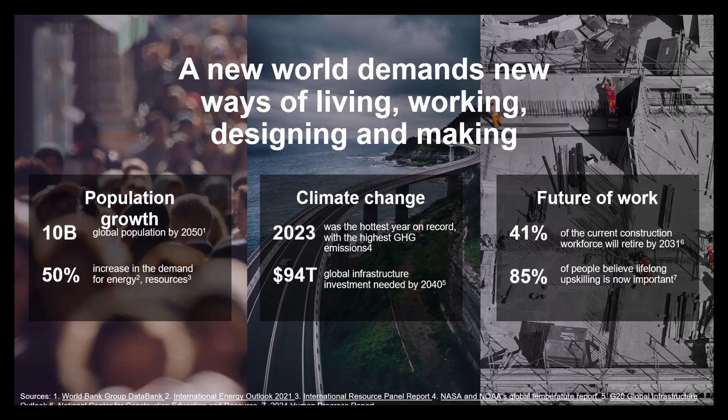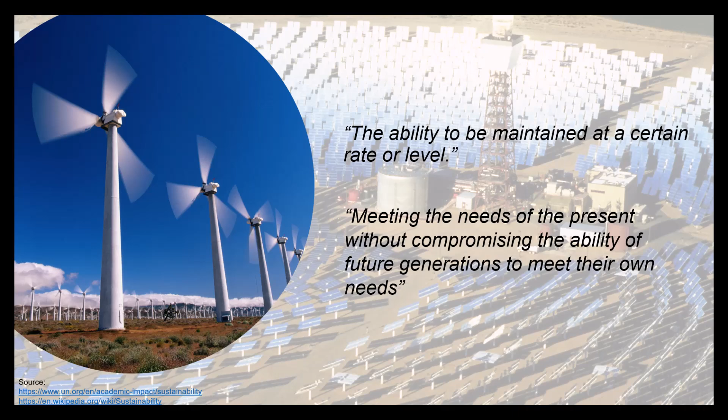It's time to produce more with less. But what is the meaning of sustainability? There are multiple definitions. We can call sustainability the ability to maintain a certain level without compromising the future.

According to all the studies, there are three main dimensions for evaluating sustainability: environmental, economical, and social. As you can imagine, all of these aspects are huge, and the presentation will be focused only on some specific aspects. It's also important not to confuse sustainability and resiliency.

Resiliency in general is the capacity to adapt quickly to any change. Resilient infrastructure refers to the systems and structures designed to withstand and recover quickly from disruption, like natural disasters, climate change impact, or other hazards.

Sustainable is different from resilient. Resiliency supports sustainability by extending infrastructure lifespan and reducing resource use due to failure or reconstruction.

For example, sustainable roads use low-emission materials. Resilient roads resist erosion from heavy rain. A sustainable and resilient road does both: reducing emissions and surviving climate extremes without needing frequent repair.

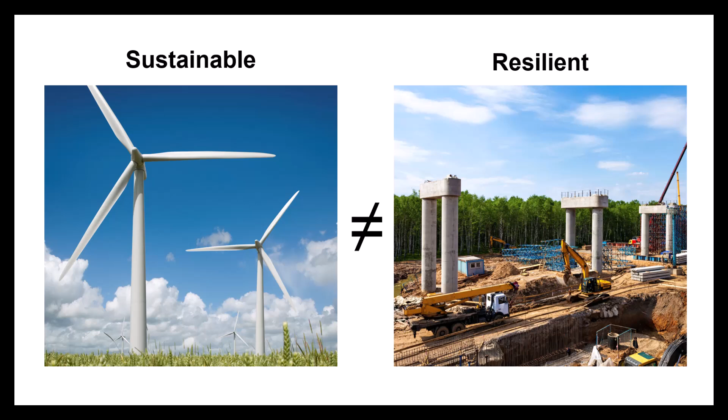The goal of sustainable infrastructure is to reduce environmental impact across the life cycle: design, construction, operation, and maintenance. Key features could be the usage of low-carbon materials, for instance recycled asphalt or green concrete.

The ability to support clean mobility, EV charging stations, bike lanes, public transportation, being more efficient in energy consumption, minimizing resource usage, for instance reducing water use or optimizing land use, and keeping attention on life cycle analysis and BIM to track emissions.

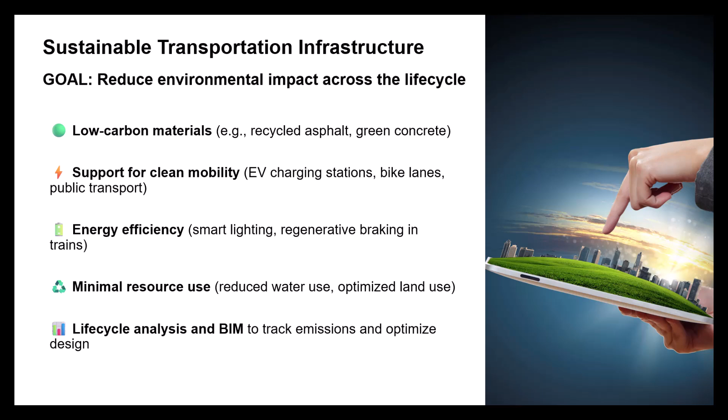And optimize design. But as mentioned before, the concept of resiliency is not the same as sustainability. Then the key factors to consider to design a resilient infrastructure might be flood-resistant design.

Heat-resilient materials, seismic design standards, the usage of digital twins and sensors to monitor infrastructure in real time and predict failures, and introducing redundancy and flexible networks.

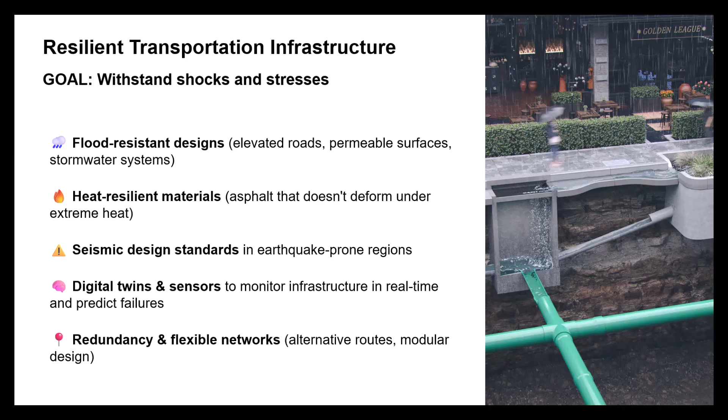These two main concepts of sustainability and resiliency are very wide and represent only one of the main challenges for the future, but also a tremendous opportunity.

Let's start analyzing the Autodesk AECO portfolio. The AECO portfolio technology offering is robust and broad. We have technology for any project stage and for different outcomes of the project.

Mainly, we can consider three main parts. The AECO Collection, with all the tools for design in different stages and in different sectors. The water infrastructure solution, addressing specific challenges for the water industry. And finally, Autodesk Construction Cloud and BIM Collaborate Pro for digital collaboration.

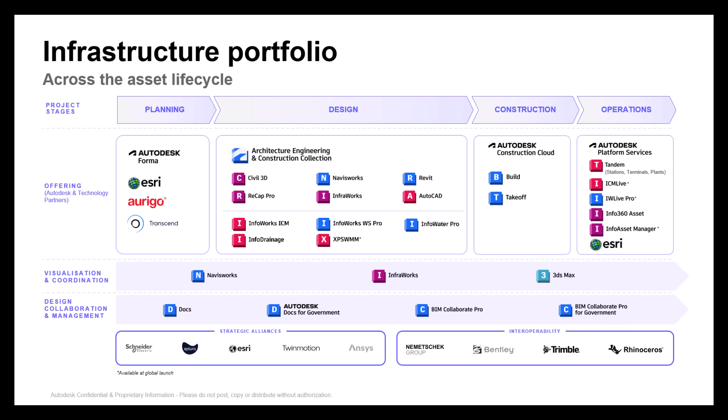According to the previous concepts, I would like to underline some specific capabilities. GIS is the first element that is important to mention in infrastructure projects. With GIS, it's possible to represent thematic maps and understand where the project is developed and which constraints are located near the location of the new infrastructure.

Autodesk and Esri have built a strategic partnership since November 2017. With this partnership, Autodesk and Esri technologies have multiple touchpoints. This partnership makes the integration between BIM and GIS stronger.

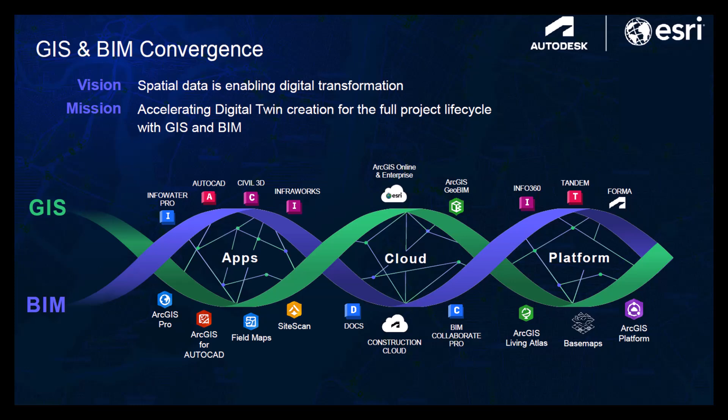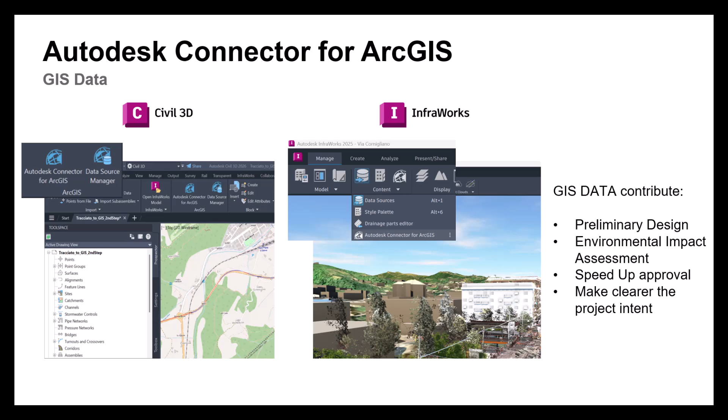Talking about technology, we developed the ArcGIS connector on top of Autodesk Civil 3D and InfraWorks. This connection helps streamline the GIS data between BIM and GIS, for instance, helping designers and planners to design faster in preliminary design, building environmental impact assessment, and speed up the approval process, making the project intent clearer.

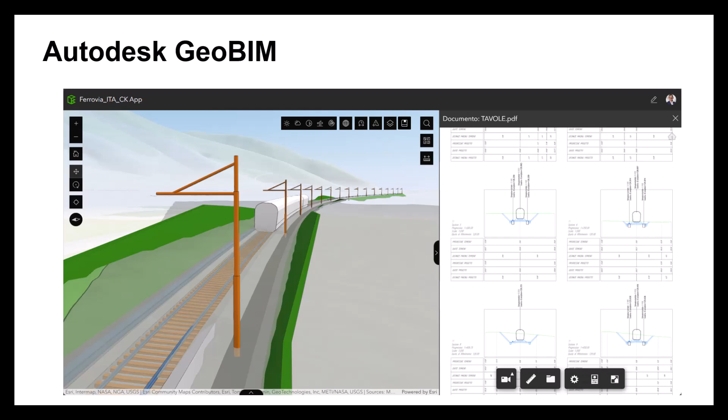But ArcGIS connectors are not the only opportunity. With GeoBIM, designers can integrate project information and geospatial context by creating a connection between the building information modeling cloud and geographic information system cloud solutions.

Carbon footprint is another crucial aspect for designing resilient and sustainable infrastructure. Talking about total carbon, that includes both the material and construction processes of creating the roadway or railway, and also the operational side of construction. For these key topics, we can count on three different applications: two Civil 3D plugins and an InfraWorks capability.

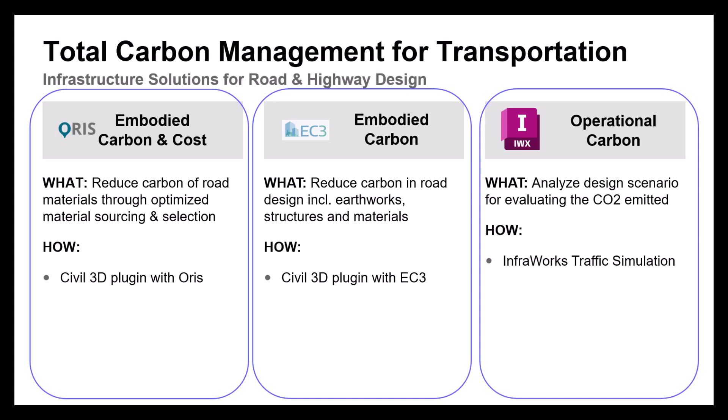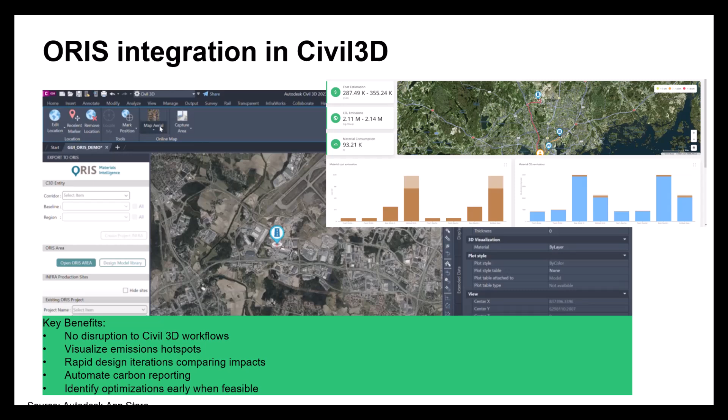The first plugin available for the carbon footprint evaluation is ORIS. ORIS is a third-party application for Civil 3D. With ORIS it is possible to import a Civil 3D project for a comprehensive evaluation of carbon and supply chain impact across specifications. The key benefits of this plugin are that it's integrated in Civil 3D, allows rapid design iteration for comparing impact, automates carbon reporting, visualizes emission hotspots, and identifies optimizations early when feasible. The ORIS plugin is available in the Autodesk App Store.

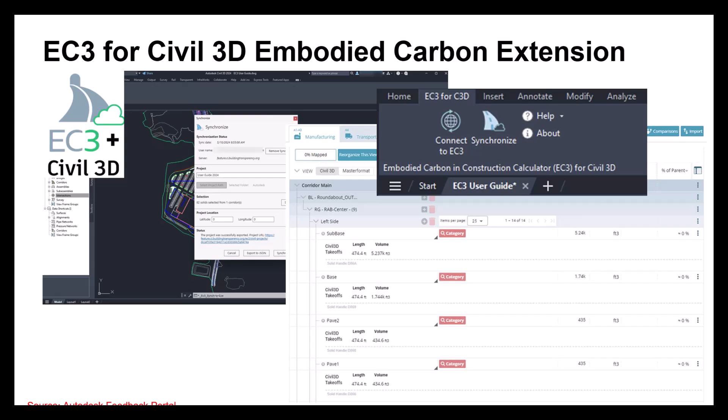EC3 for Civil 3D is an extension available in our Autodesk feedback portal. This application is part of the beta program, so it can change at any moment. EC3 is the only free and open access global embodied carbon accounting tool. EC3 enables carbon smart choices during material specification and procurement. EC3 allows designers, construction companies, and material suppliers to directly measure, compare, and reduce the embodied carbon for their products and projects. In both cases, with ORIS or with EC3, material analysis is crucial to take better decisions.

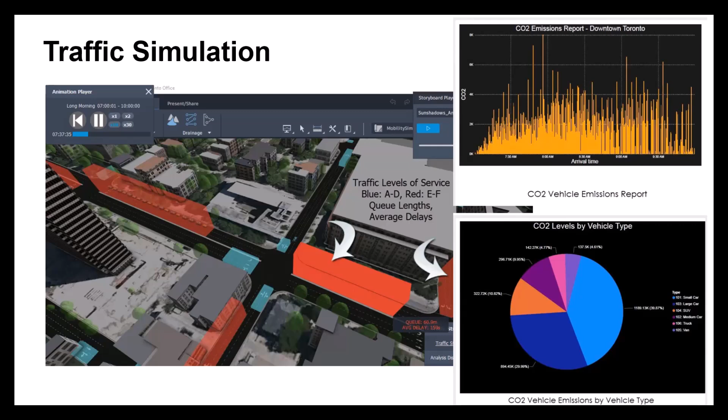The last application that I would like to mention is the traffic simulation module. With mobility simulation, traffic simulation is one of two specific engines that you can find in InfraWorks. Designers can use the traffic simulation tool to analyze traffic flow through intersections, display color-coded traffic analysis results, and generate traffic simulation animations to play in our model. Use the traffic analyst panel to specify advanced demand matrix profiles, vehicle types, driver types, and of course the emissions.

Water is one of the key aspects for the sustainability and resiliency of infrastructure. Water is a precious element, but it can be a threat. Due to the climate crisis, different regions of the world can be impacted by water scarcity or by devastating floods, damaging infrastructure and houses.

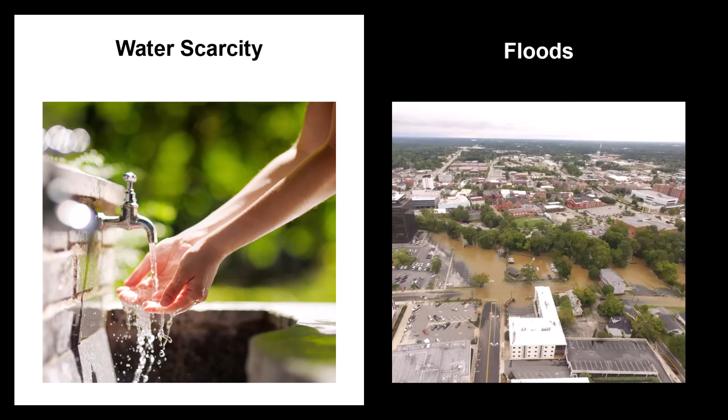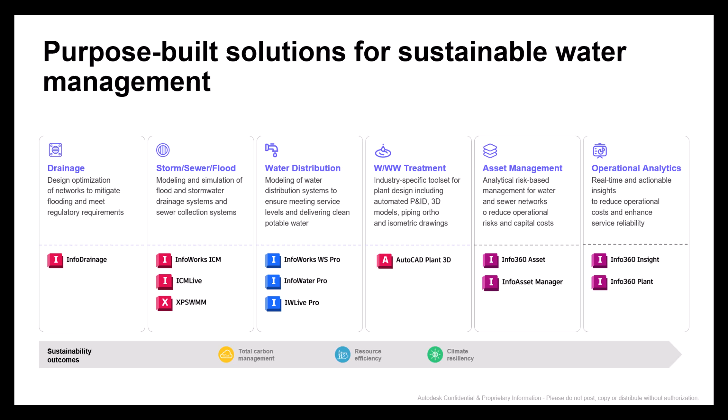Regarding water scarcity, in the Autodesk portfolio, we can propose a large set of powerful tools like InfoWorks WS Pro, InfoWater Pro or IWLive Pro. This set of tools can perform deep hydraulic calculations.

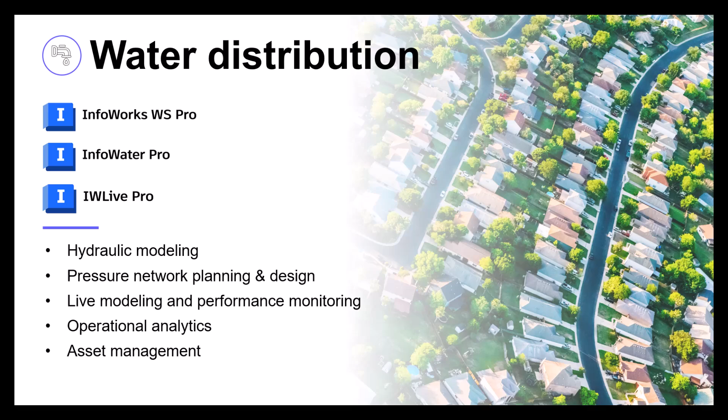There are topics very important for infrastructure design, like wastewater, stormwater, and flood management. Typically, drainage design, network catchment design, and hydraulic calculation are always part of infrastructure design, especially for resilient infrastructure. Here are some of the key things that you can do with our products for wastewater, stormwater, and flood management.

InfoDrainage allows the design and analysis of site-specific, sustainable drainage design for land development and transportation projects. With deep integration with Civil 3D, drainage designers benefit from collaboration with the BIM process. InfoWorks ICM is our most powerful modeling tool with integrated 1D and 2D capability to model your entire catchment system and make key decisions for capital planning, stormwater planning, urban development, and more.

Together with ICMLive, InfoWorks ICM can also be used for operational modeling to predict in real time the effect of stormwater and overflow events.

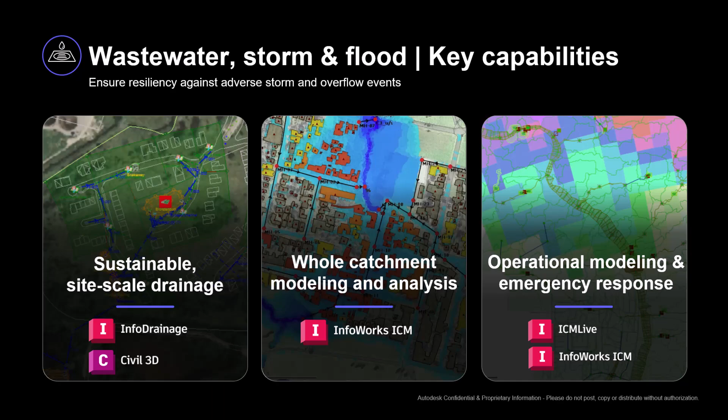InfoDrainage is the first solution the designer can consider for evaluating the impact of stormwater in linear infrastructure like road and railway. InfoDrainage provides a large set of data integration like CAD, GIS, terrain model, and also the capability to perform hydraulic calculation in 1D or 2D dimension.

InfoDrainage is directly connected with Civil 3D. By a specific tab in Civil 3D, the designer can export and import the Civil 3D network. This direct connection enables the BIM process and speeds up the design process, reducing rework across the team.

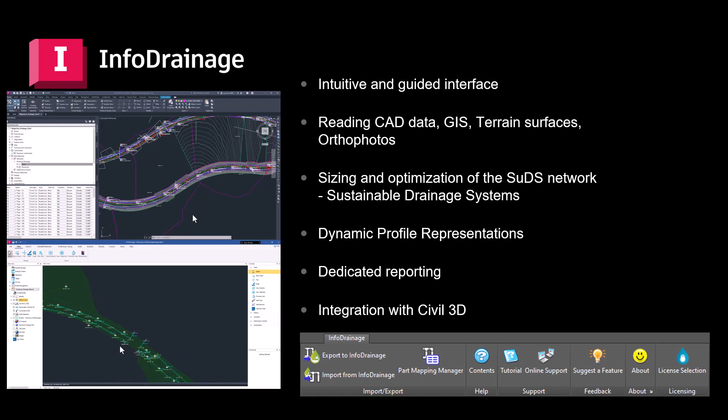InfoDrainage provides a different set of capabilities specifically designed for sustainable projects. In InfoDrainage, there are specific flow controls based on national standards for sustainable drainage, like bioretention, drywell, ponds, and more.

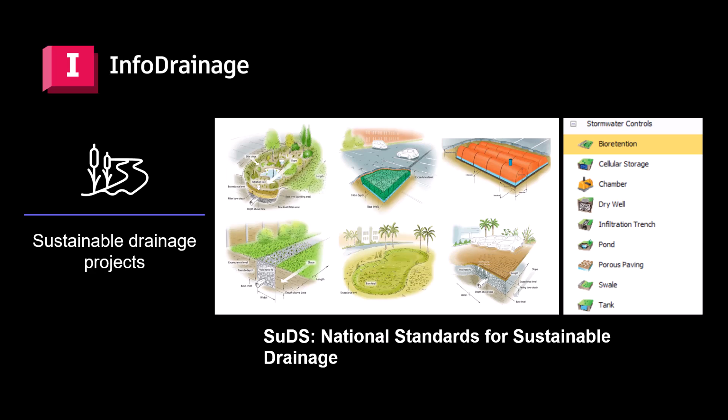When the infrastructure project becomes very large and a more powerful calculation is needed, we can offer InfoWorks ICM. ICM is the Autodesk most powerful modeling tool with integrated 1D and 2D capability to model your entire catchment system, evaluating also the river analysis.

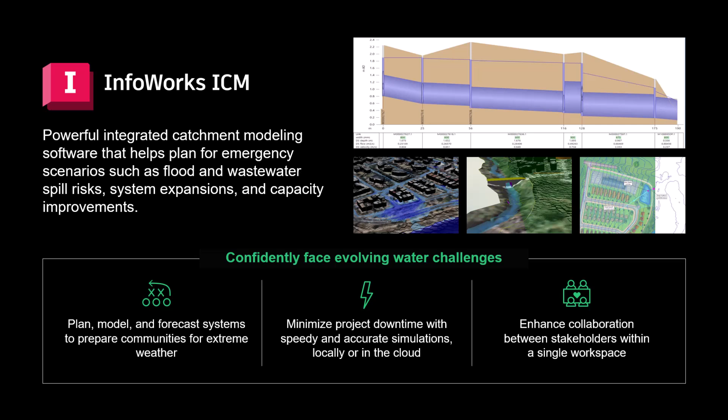Collaboration is the key to success for any complex project such as infrastructure. With a clear collaboration, it is possible to collect properly the data along the entire life cycle of the project. Our vision is to support a full digital asset life cycle management process for architects, engineers, constructors, and operators.

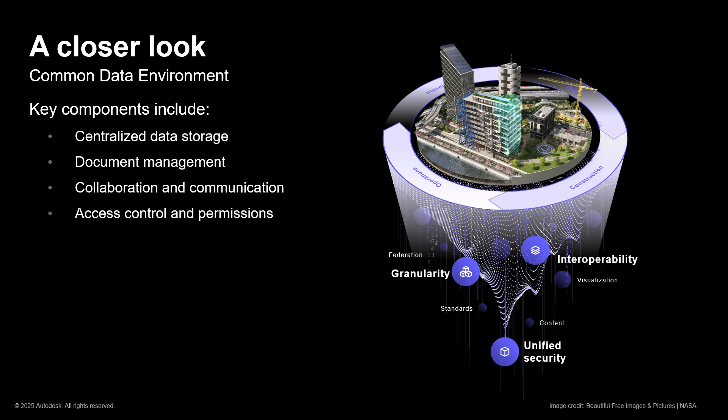Collaboration and communication, a platform for seamless communication and collaboration among project stakeholders, including architects, engineers, contractors, and clients. This promotes transparency and coordination. Access control and permissions, security features that regulate access to the project data. It ensures that only authorized users can view, edit, or manage specific files or information.

Audit trail and compliance, built-in auditing functions that track user activity, document changes, and project updates are critical for compliance, accountability, and traceability. Integration with other systems. Compatibility with design, modeling, and construction management tools like BIM can provide smooth data flow across a project's different phases.

Data accessibility. Cloud-based access helps stakeholders to retrieve and manage data from any location and fosters real-time communication and decision-making. Workflow automation. Features like automated submittals, approvals, and transmittals streamline project processes and improve efficiency. These components work together to ensure that the CDE supports efficient project management, accurate data exchange, and clear communication through the project lifecycle.

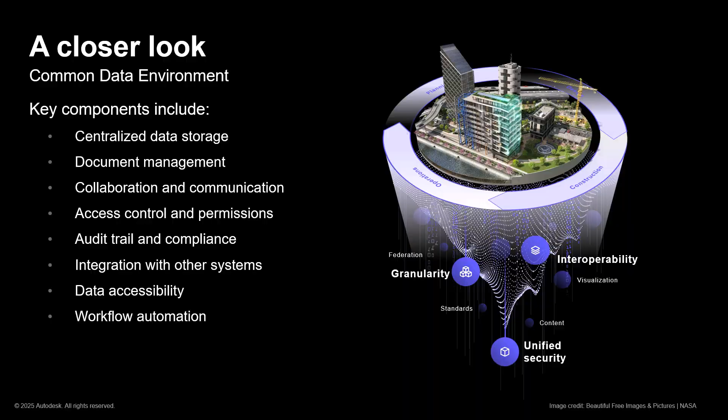The Autodesk Construction Cloud is a centralized platform built for AECO firms that enables real-time collaboration and workflow automation across the teams. Docs is the foundation of the CDE, but thanks to all the Autodesk Construction Cloud, BIM Collaborate Pro, and the interoperability with the desktop solutions, we are able to provide an end-to-end solution for any design and construction project.

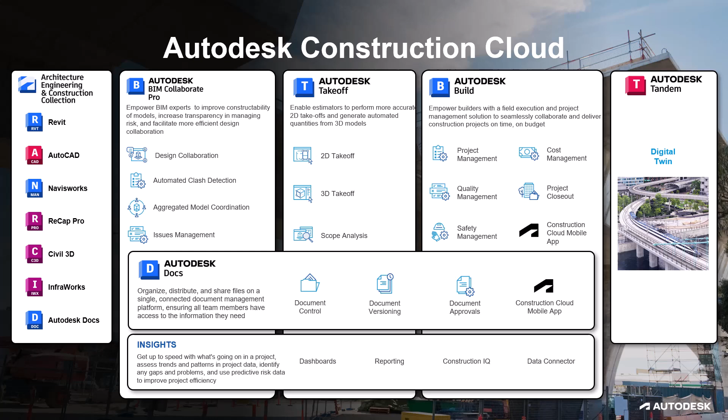Digital collaboration, streamlined communication, document sharing, and data management, improving project performance and coordination. The adoption of ACC and BIM Collaborate Pro helps designers to take right and faster decisions for more sustainable and resilient infrastructure. Thanks for listening.